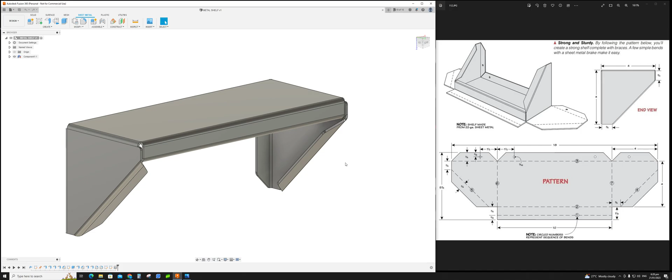Let's see if we could program this part. Anybody interested to see how the program flows for this simple part? It's a steel shelf. So let's do it, this is the guide we'll follow. This is the pattern, as you can see.

Let's start. First of all, we need to be in design and then sheet metal right here. Okay, we'll start with a new component. New component, sheet metal, and the name, let's just put steel shelf. Okay, let's save it.

Sheet metal rule is set to mm. I don't like millimeter, I would like inches. Let's do aluminum. Let's go. So we start

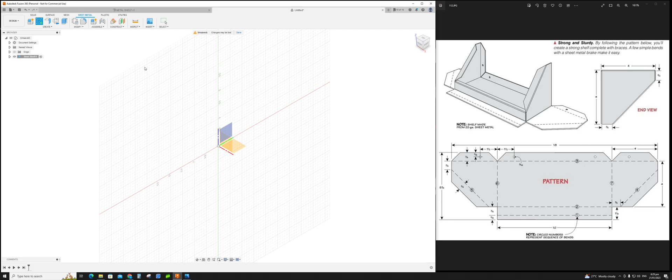by the sketch. As we can see, we have 10 inches here. Let's do that first. We can see it's 10 inches by 4 inches. Let's do that.

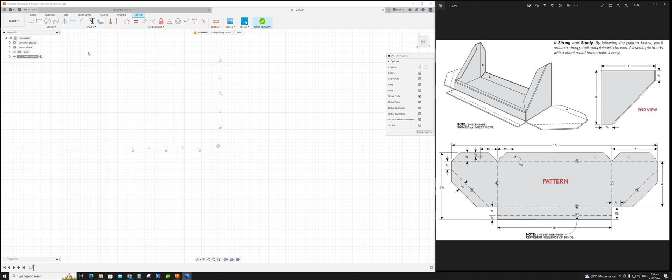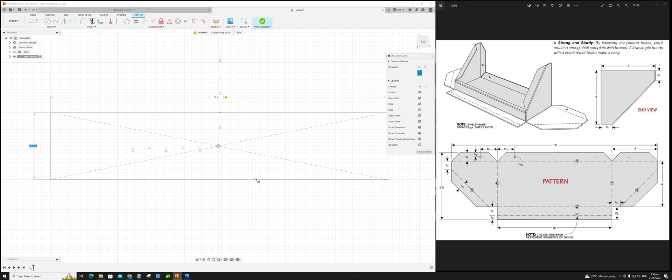Let's do center rectangle, center. There you go. Okay, just open it like that. Let's type 10 inches there, press tab, and then 4 inches, then enter. There you go, we have it. Sketch done.

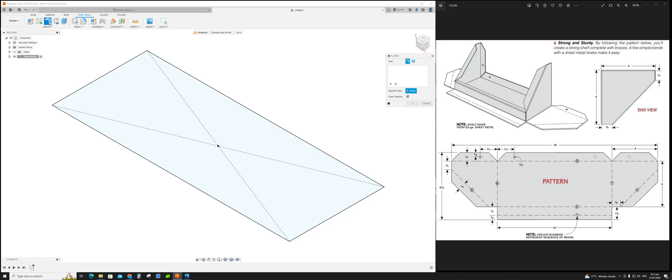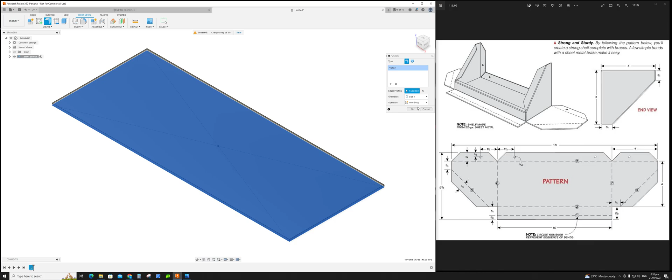Now we're going to create a flange out of this. So let's click flange, click the 4x10 we just did, and then select the body, and this is a new body, press OK. So as you can see, we did the flange already. It's there, we can see it. The dimension is 4 inches here by 10 inches there.

Now as you can see, the next part we need to do is create this part right here. So it's calling for 4 inches from edge to top, and from this edge to top it's 4 inches. It's visible here. So let's do that.

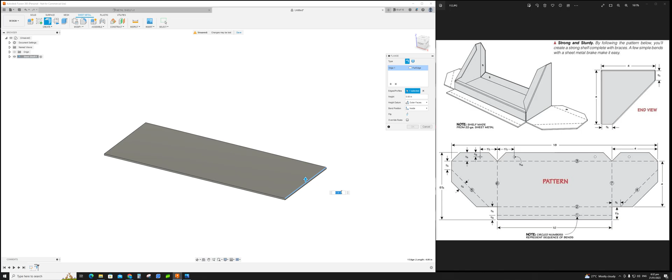Click flange, click this corner. It's showing going up, that's exactly what we want. You can see here, press number 4 for 4 inches, and enter. See how easy it is? Let's do the other side. Flange again, that corner top, 4, and enter. So we have this already. It's very easy, as you can see.

Now we need to do this part, this cut out. We need that, but I see something wrong here. You can see this is a 3/4 cut, and this is a 3/4 cut also. If you bend this and bend this up, the 3/4 and 3/4 will hit each other. Therefore, we're going to move this a little bit up to make room for this bend. Later we'll see that.

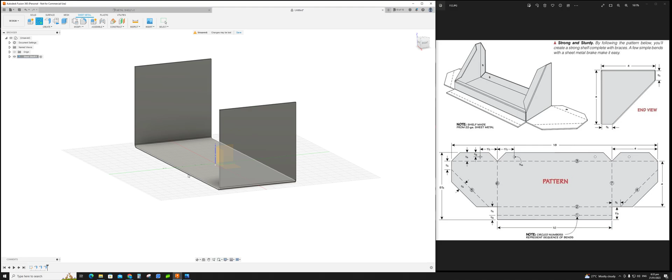We got it, let's see. Create sketch, pick a plane. I will pick this part right here, this part. And L for line, you can click it up here or you hit L for line. Put a line right there, it really doesn't matter where you put it. We're going to dimension that after.

And it's there, then press D for dimension, or you can click it up here also. So D for dimension, we're going to dimension it up here. This, I think we could get away by 0.850. That's dimensioned already, like this.

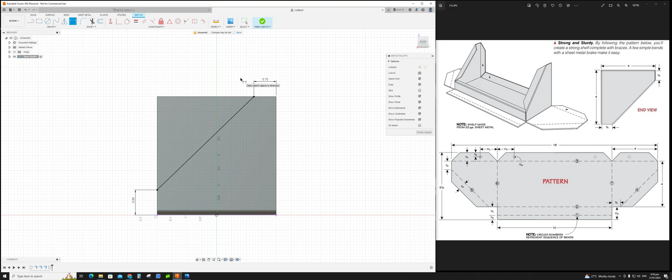It's okay, we could just follow the 3/4 of an inch, which is 0.75 of an inch in decimal. There you go, very simple, right? Then finish sketch, we have that already.

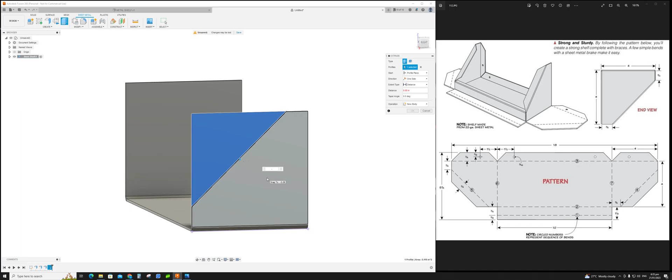Click this extrude, click this part. And what we're going to do is cut all throughout to the other side. So what we need to do is check the height of this. We know that this is 10 inches, so negative 11 to go past that. 11. So you can see, the cut already went past it. Alright? There you go. You can see visibly it's cut already.

Now let's do this part. Let's do this bend, this 1, 2, and 3. We will bend this flange in one go, okay? So it's calling for 3/4 of an inch, 0.75 in decimal.

Let's do that. Another flange tool, click the flange. Hit this part, another one, and another one. And then let's type 0.75. I'm sorry, 0.75. There you go.

As you can see, we already have a cut, we have a relief, a round relief, and a 45-degree cut. I will just show you.

Let's do this back. Okay? See, if we're going to do just one side, this is what will happen. That's why the programmer needs to know all this.

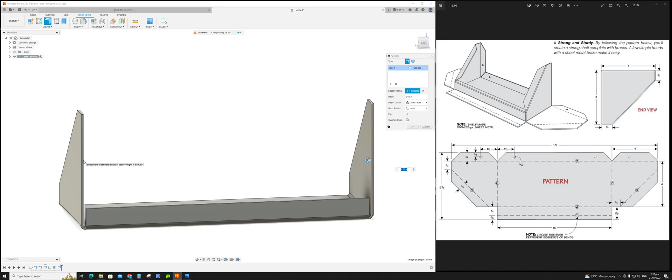0.75. 0.75. There you go. You see, there is no 45-degree chamfer cut there, which means if we're going to agree with that and then do another flange, select this and select this. Let's see. 0.75 again.

You see, there's a problem. It will not be incorporated into our CNC cut. This is a failure. That's why let's go back and redo it in one go.

Flange, this corner, that corner, that corner, and 0.75. There you go, finish. You can see that's that.

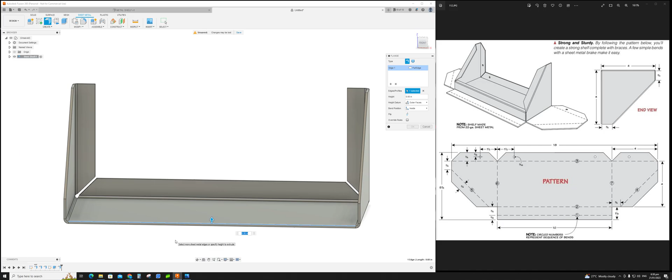Okay, now let's do the part here. Another one, flange tool. Click it here, 0.75, 0.75. There you go, as you can see, we raised that earlier.

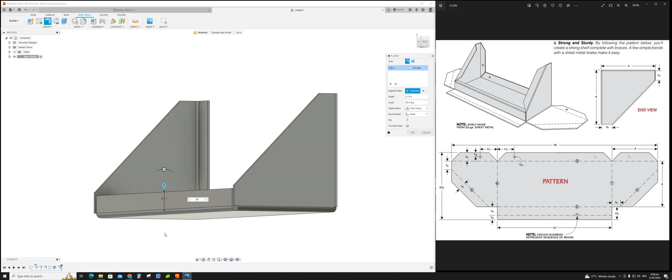If 0.75 also here, a while ago, remember, this one we raised. This is 0.75. We made it 0.85 to give the allowance for the bend. That's why programmers are very important. So see? You see the difference now.

So let's finish this one. And another flange. Inwards, this is just 0.2. 0.25. 0.25. There you go.

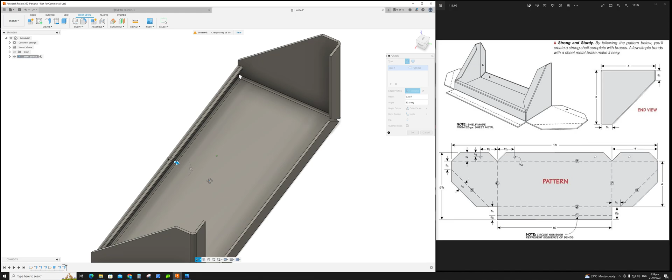Let's make it 0.3, better. It's better looking with the 0.3. Now, so we're getting close, almost there. See how simple it is, guys. Most people are just afraid because of technology, but in reality, if I can do it, you can do it.

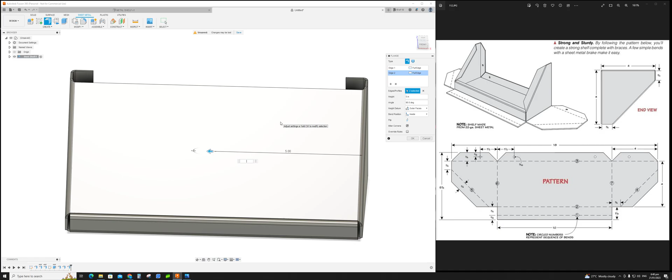Flange tool again, and let's take this. One more. 0.75. 0.75. There you go.

As you can see, oh, we have a clearance. We have a clearance right there. You see that? That is our clearance. That's why we raised the cut earlier at that corner.

They are calling for 3/4 also. The corner here, oh distance, see? It's 3/4, 0.75. If it's 0.75, it will hit each other. It will hit right there. There will be a problem. Our design would not be successful.

Well, that's it. We already programmed this, as you can see. Okay, as of now, it's good. But...

This needs a little bit of work. Let's put like a 45-degree here. As you can see, there's a chamfer 45-degree at the corners, 45-degree here. You can see it visibly here. Let's do that, and at the top.

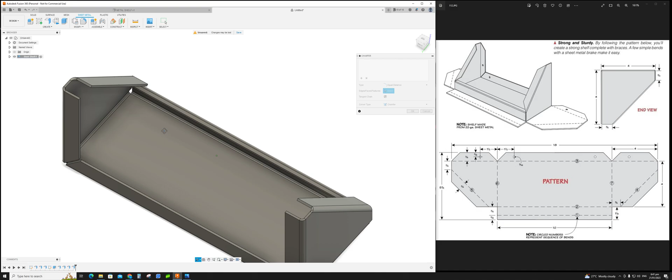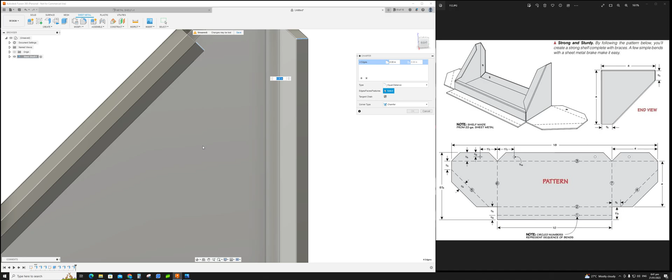So what we do: modify, click here, upper, modify, and chamfer. See that? Let's hit these corners right here. 1, 2, 3, 4. We know that we need to chamfer those.

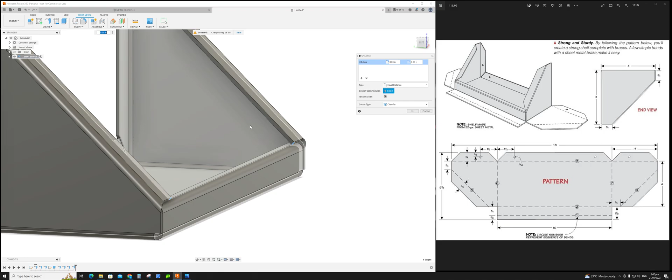Also this one, and the other side. This one. Now, we selected 1, 2, 3, 4, 5, 6.

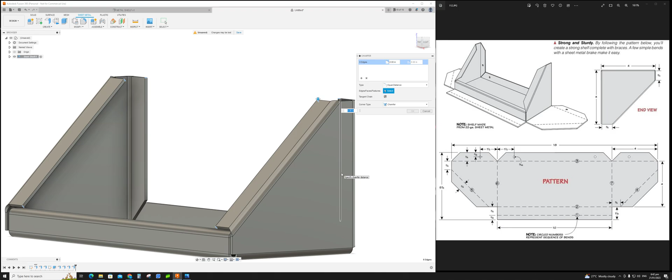Okay, now you need to compute. In my case, I already did, that's why I know the chamfer size that's going to be put in. It's 0.59. There you go, 0.59. This is it, 0.59.

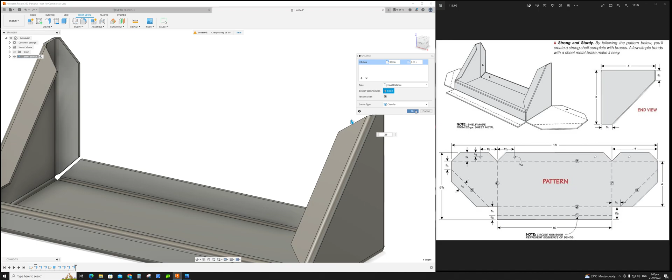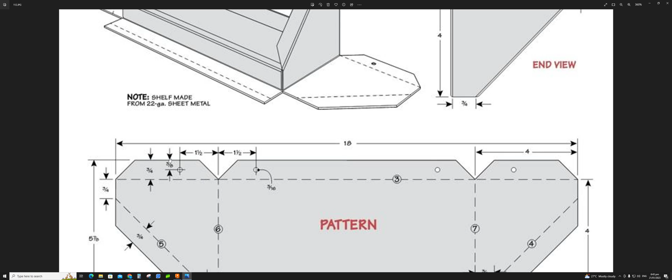Okay, so now we're left with just cleaning up to do. Oh, we forgot, we need to put holes here. As you can see from the print, they are calling for a 3/16 hole right there, and 0.38 distance from the corner. So let's do that.

Create sketch, hit this one here. There you go. So what we need to do is hit this, create, and point. Let's just put some points here. Point, point, point, and point.

Now let's dimension it, D. For dimension, we can see it's calling for 3/8 from the corners. It's 3/8. See, so 3/8.

Okay, before we do that, I'm going to show you something perfect for this one. So as you can see, let's remove all the points that we did. There you go, let's put point, point, point, and point.

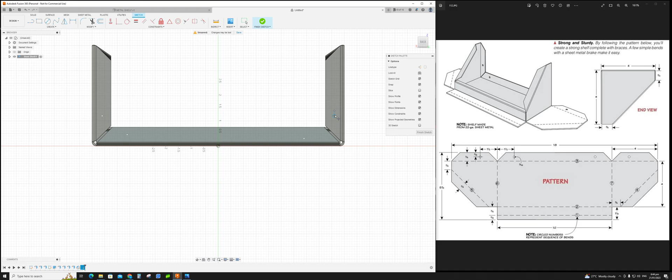Now we can use this right here, the horizontal vertical constraint. Click that, click this, and click this. See? There are now constraints. This one and this one, they're now aligned.

Now, since they are aligned here horizontally, if we dimension it from here to here, it's calling for, how high, 1.5 inch from this corner. So let's dimension it from there, here. Look at this side, it will move also. So 1.5, enter. See?

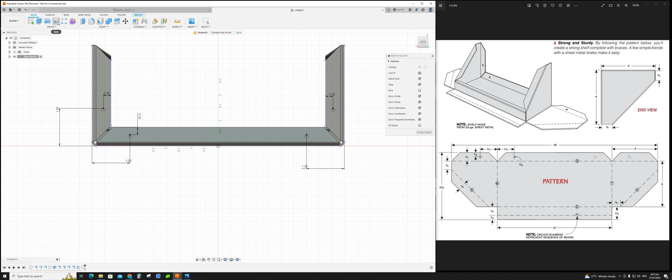Now it's already dimensioned, right? So the remaining thing to do is do the holes. Let's do the holes. Click this, under solid, holes.

1, 2, don't worry, it just looks big, but it's fairly fine. Now we selected 4 because we're going to use 4 holes. We're just going to select hole type, size, simple through hole, drill.

There you go. Distance, it's just 0.2, all right. See, it will punch through. Now, this is the size of our hole.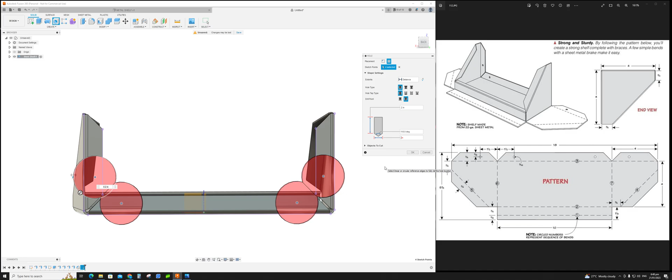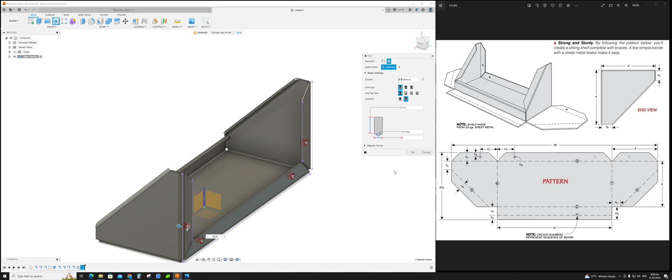0.135. Let's see, 0.135. Let's make it bigger, let's make it 0.35. Too big. 0.25, there you go, 1/4 of an inch. Let's see, yeah, it's still too big. 0.185, that's it. There you go.

So, easy, there's our hole now. Well, we need to chamfer the corners. Let's modify, excuse me, chamfer. Chamfer, there you go, let's just type 0.03.

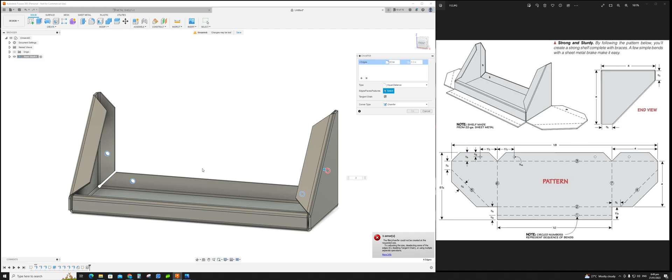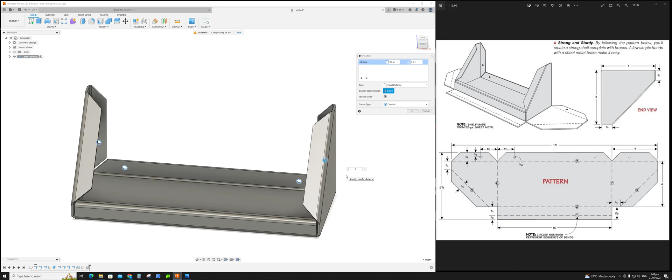0.03, there you go. We can go bigger. 0.04, there you go. See, we have a chamfer on the shelf itself.

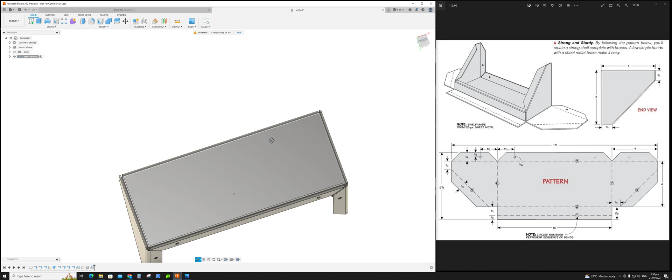Now, what we have is a complete part, but it's not done yet. We need to put radiuses on those. So let's click fillet.

Same procedure. Click 1, 2, 3, 4.

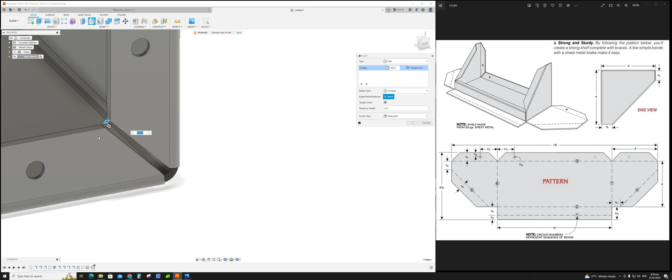We really need to do this, so if somebody sees your project, they know that it was done professionally.

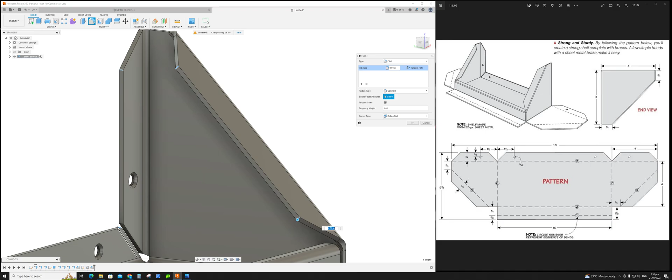We have a lot of those. Let's do that also, this part and the inner part.

Of course, you won't be able to see it. No one can see it, but it will reflect on your work.

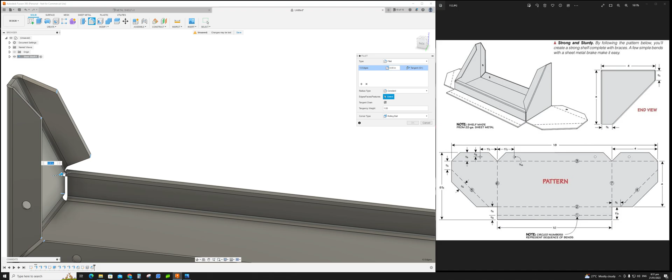Let's deselect this. I think the radius for the fillet we need to put there is too small, so let's remove that. Okay.

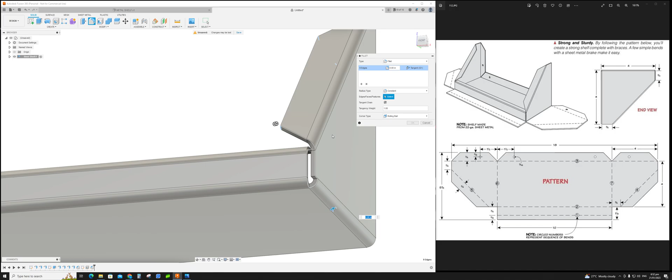Let's see, fillet. Okay, 0.3. As you can see, there you go. It's all rounded up, no sharp corners.

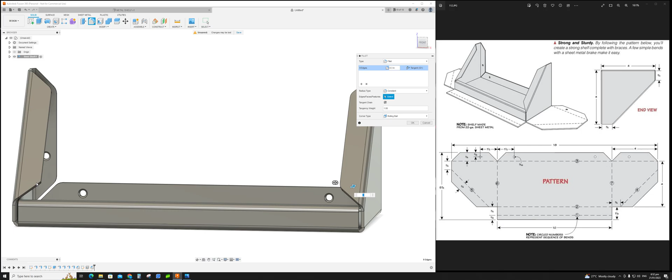It's not sharp. Oh, we forgot this one. If you forgot an edge to radius, you need to hit control. See, I'll hit control, it will highlight. Let go. See, control, and then you can select another feature there.

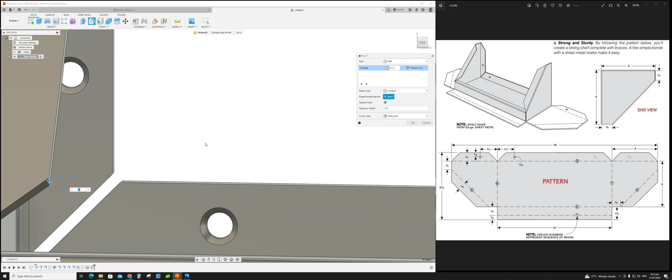There you go. Let's click OK. One thing left, the small corners. Another one. Let's do fillet. Do this.

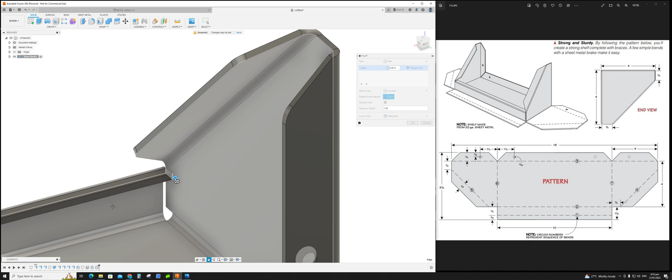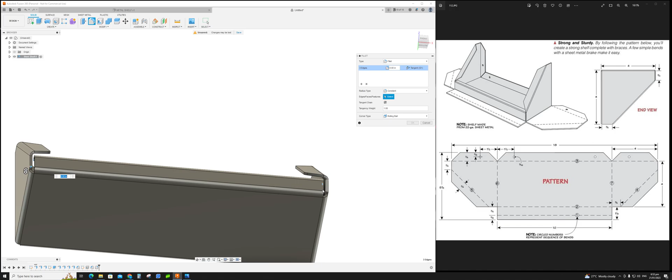That one, the under part, this part, that part, and then hit 0.1.

You see? There you go. As of now, we have a complete product.

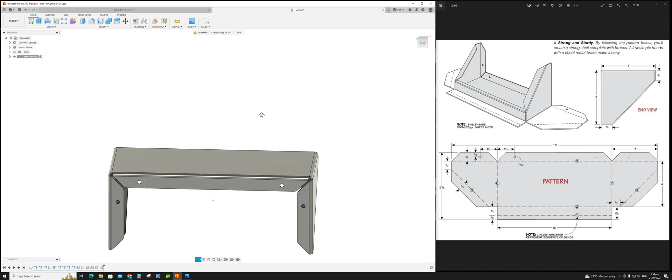So if you're going to go to sheet metal up here, sheet metal, this is the complete product that we did. Okay, it's complete now. Let's hit flat pattern.

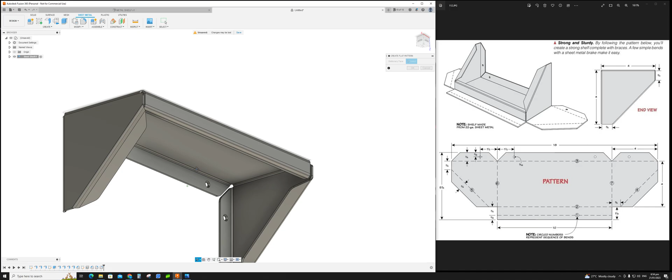Hit the base part that we did, which is where we started here, flat pattern, stationary face. Okay, and okay. There you go. So immediately we could export this.

This is on the upper part here. You can see export DXF. So this is the only file you need to export. Send it to laser, CNC, or whatnot.

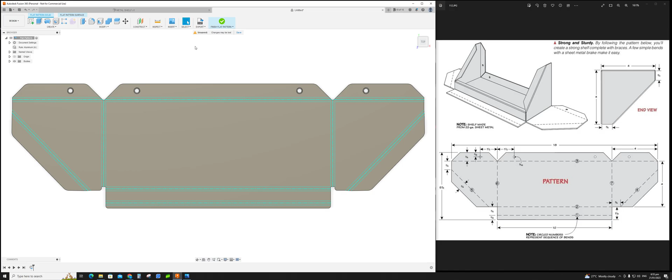Well, we're done with this. Let's put it back in its form.

But I can see improvement. If you're going to ask me, yes, we can make improvements.

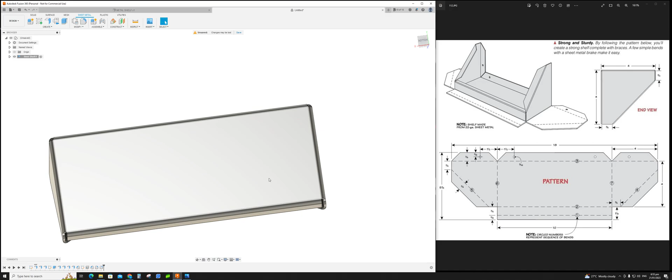We could put some ribs here. There, we could put some ribs. Let's do it. Let's click this top part. There you go.

Let's click the rectangular pattern. Rectangular pattern. There you go. Okay, let's do

1/4 of an inch. 1/4. Now let's do 0.3. Tab.

And do 3 inches. 3 inches. There you go. Have it, it's there already.

Now we need to corner this part, fillet. It's okay. Just click the first line, second line, first line, and second line.

Now let's change the dimension to 0.15. 0.15. There you go. Much better.

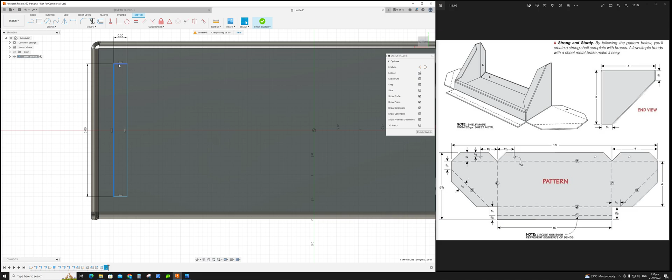I see something wrong. Okay, again, let's do the fillet. 0.15.

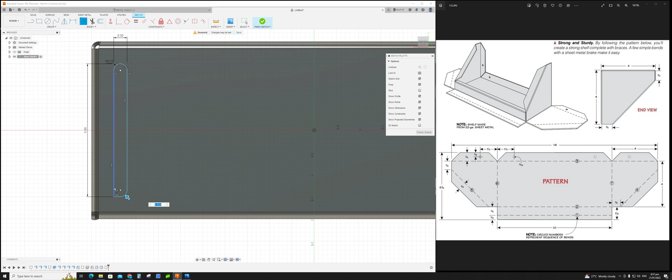There you go. This one and this line, this line and this line, and press enter.

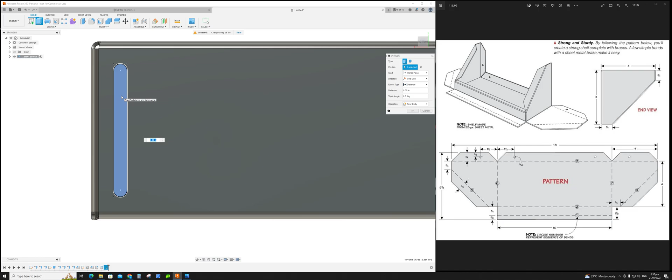Now we're done. We could go to solid, extrude, click this part, type -0.2. Let's see, there you go. It's cutting. You can see here, operation cut. Okay, click OK. There we go.

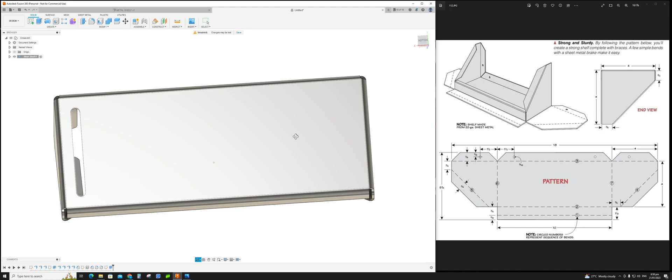So we have this already. Now, how do we copy this feature? Of course, if you're going to sketch another one, it's a very long process, right? But there's a shortcut I could teach you. The shortcut is

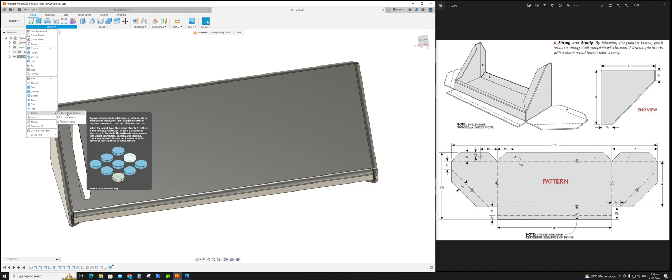Create pattern, rectangular, click it, and then come here. You can see object, we don't need the object. We need feature, so we click that and come over down here.

You can see here it's a shelf cut, the extrude, the last pattern that we did. Click it. As you can see here, now click the axis where you want to pattern it from.

We need to go this side over here. So let's click a line here. Axis, let's click a line. There you go. There you go.

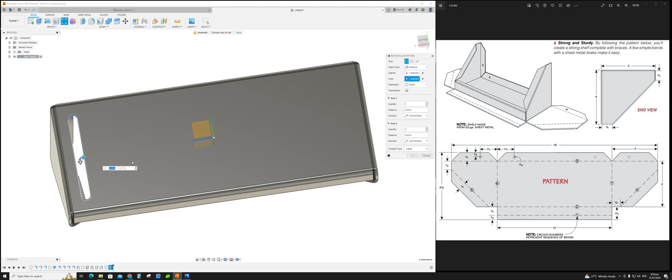There you go. So now we're going to copy this like 16 patterns. Let's do 16. 8.8 inches. Oh, there you go.

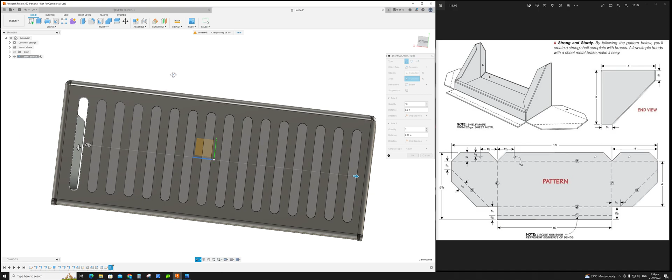You can see. Let's hit OK. There you go, finished product.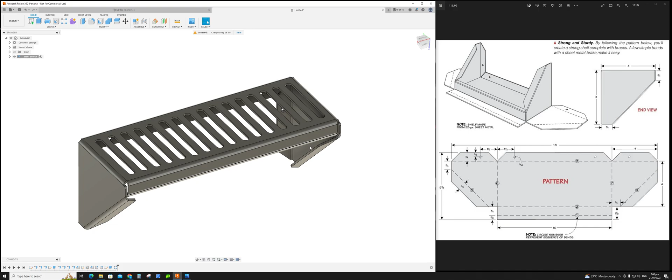Send it off to CNC. Whether it's a water jet or any other, but you can see, oh, this is already a finished product.

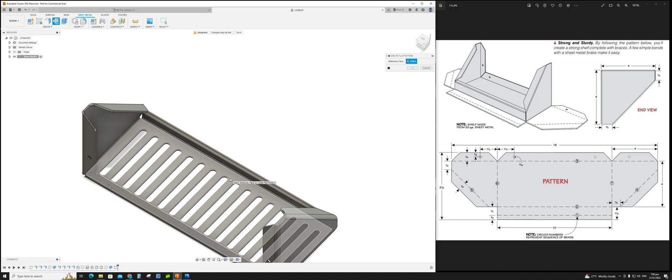Let's go back to sheet metal and then create a flat pattern. The lower part that we did. There you go.